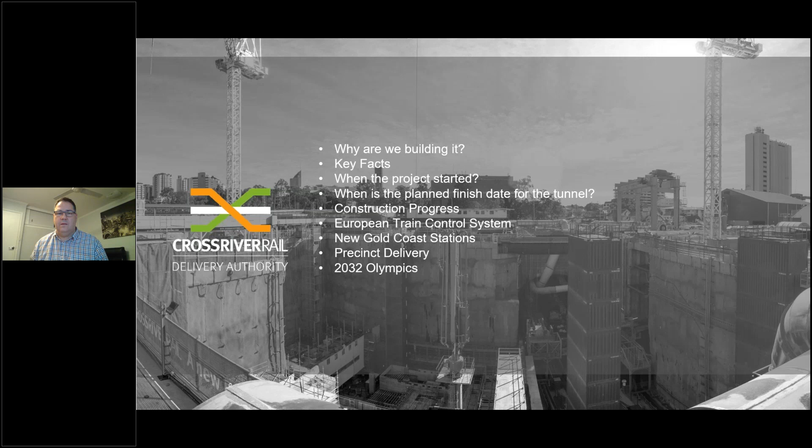So just quickly, Cross River Rail is primarily a second rail line across the Brisbane River - in our case, under the Brisbane River. On the graphic in front of you, the maroon lines are the existing rail lines at Queensland Rail. The blue line is where the Cross River Rail is going to run. There's a metro system currently being constructed, which is the green line - it runs from Dutton Park right through, following the busways. The orange line is the existing busways in South East Queensland. There are some key locations: Dutton Park, Boggo Road, Woolloongabba, Albert Street, Roma Street, and Exhibition Station. I'll talk a little more about those later.

Cross River Rail is basically split into 3 major packages of work. The one I work on is Tunnel, Stations and Development - that's construction of the major tunnel from the southern portal between Boggo Road and Dutton Park, right through to the northern portal between Exhibition Station and Roma Street. Then there's the Rail Integration and Systems team, an alliance arrangement doing a lot of the brownfield works north and south of the tunnel portals, and responsible for integrating all the systems into Queensland Rail's ongoing train operations. Finally, ETCS - no surprise to those of you in Europe - is the European Train Control System, new to Queensland.

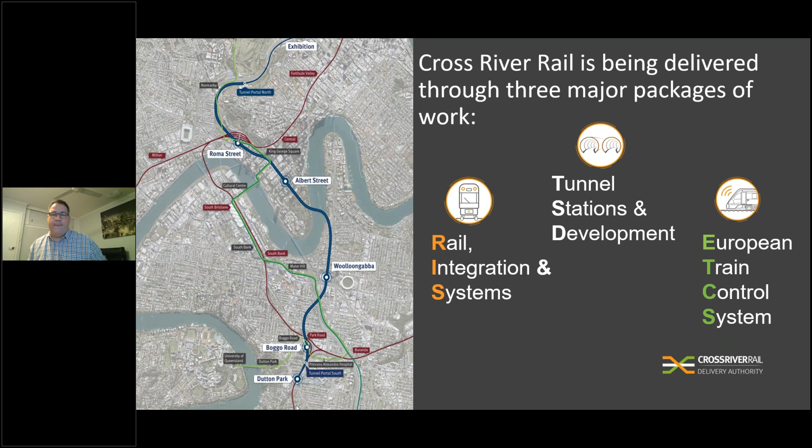So when it's finished, Cross River Rail will deliver just over 10 kilometres of new rail line, just under 6 kilometres of twin tunnels underneath the Brisbane River and CBD - that's the central business district, I'll keep saying that - 4 new underground stations, 8 upgraded stations, 3 new Gold Coast stations, and 1 new world-class signalling system.

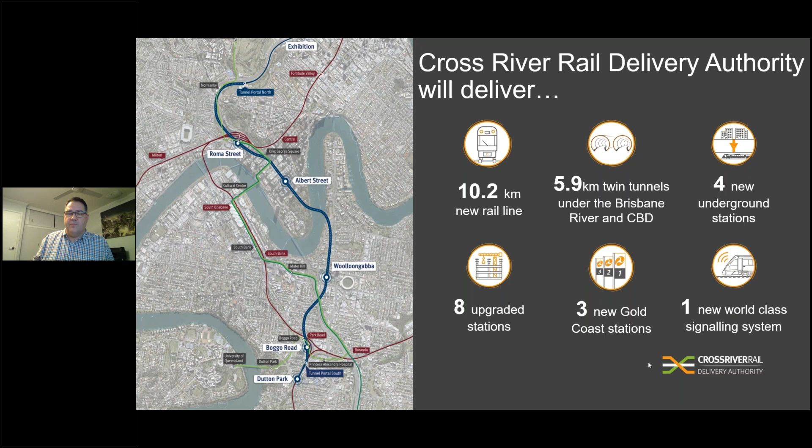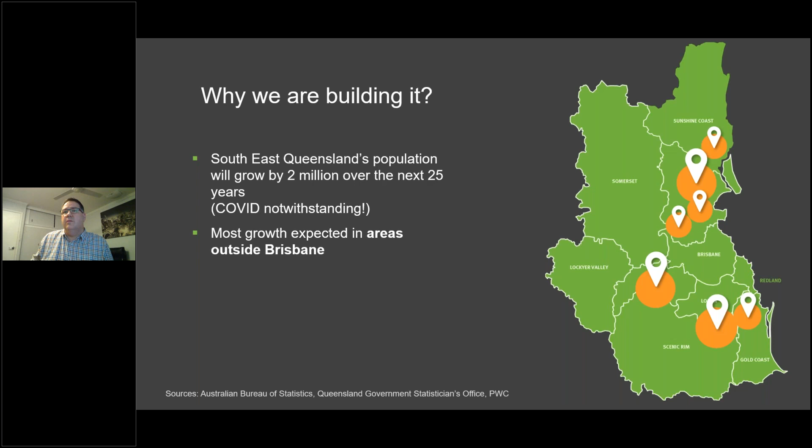So firstly, why are we building it? The South East Queensland population will grow by 2 million over the next 25 years, and that's COVID notwithstanding. To put that in context, Australia's population is around 25 million, and Queensland's population is generally in the 4 to 5 million range - so it's huge growth in South East Queensland. Most of this growth is expected outside the Brisbane area, not in the inner city but in the outside suburbs. The problem is 45% of the job growth in the future will be in central Brisbane, so clearly there's a mismatch - most of the population is on the outskirts, but the jobs are more likely to be in the centre of the city.

So in the future, more people will have more reasons to travel to, from and through Brisbane.

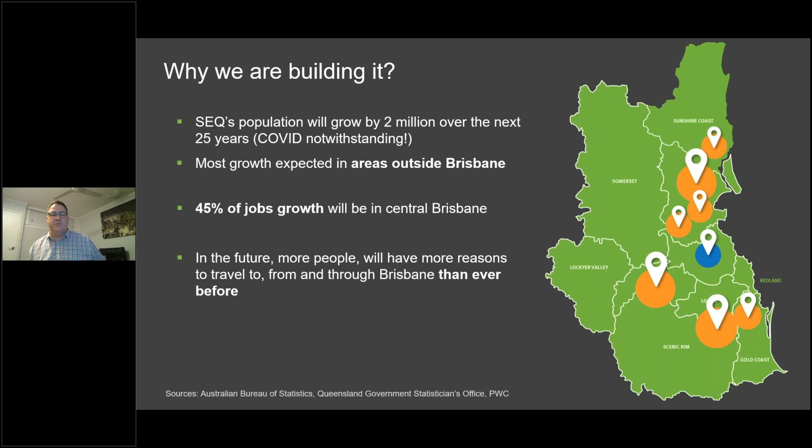The issue of Brisbane's rail system as it stands today is that it's a single inner city rail line. It bypasses the CBD, the central business district, this sort of nose-shaped bit that sticks out. The existing rail line weaves around it, and every single train on the network passes these same 4 inner city stations.

The system also has a bottleneck at the Merivale Bridge. It's only a 2-track bridge. Basically, this line goes off towards the western suburbs, and this line goes down to the south. There's a direction up to the port, but also down towards the Gold Coast.

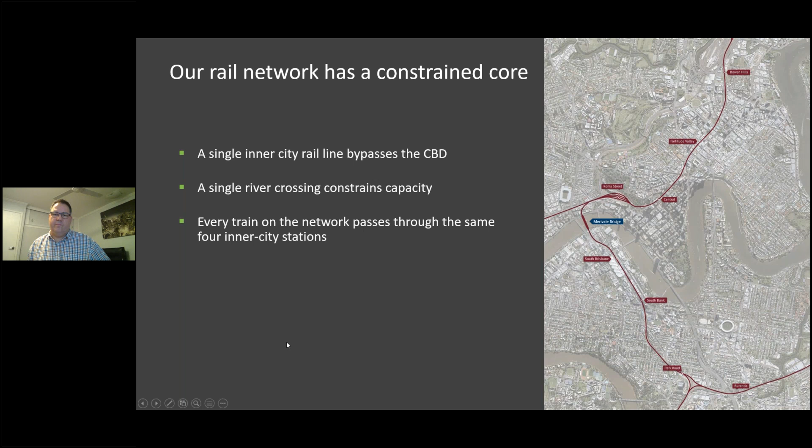So what does cross-river rail mean for the network? Shorter journey times from door to door, the capacity to increase train frequency, a second river crossing, reducing network frailty. At the moment if we lose that crossing, you basically lose the Brisbane rail network. New stations in more convenient locations, increased integration with bus services, and hopefully it'll make public transport more popular and future rail network extensions more viable.

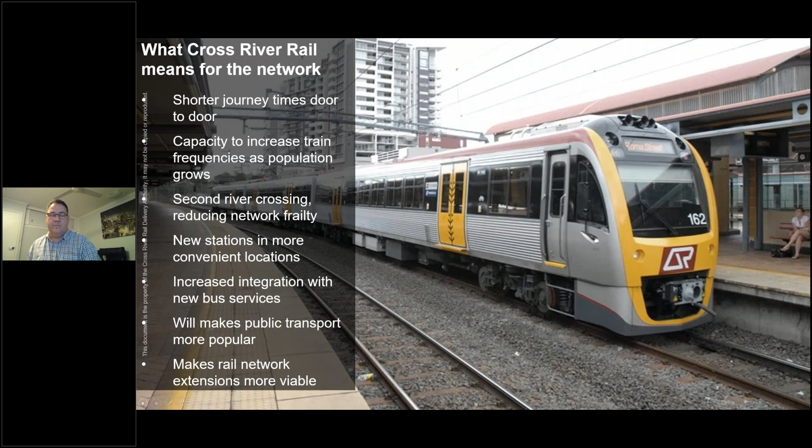So a quick summary of why cross-river rail is needed. We've got population growth of 1.5 million over the next 15 to 20 years. 80% of this is outside of the Brisbane local government area. 45% of jobs growth, meanwhile, will remain central. The road system alone will not be able to cope with that. Our rail network has a bottleneck that impacts the whole of South East Queensland, with just one rail crossing of the Brisbane River at Merivale Street Bridge.

The construction activities are due to be completed in 2024, at which time a detailed phase of testing and commissioning of the new signalling system will commence, and then following extensive safety assessment and accreditation, passenger services are expected to commence in 2025.

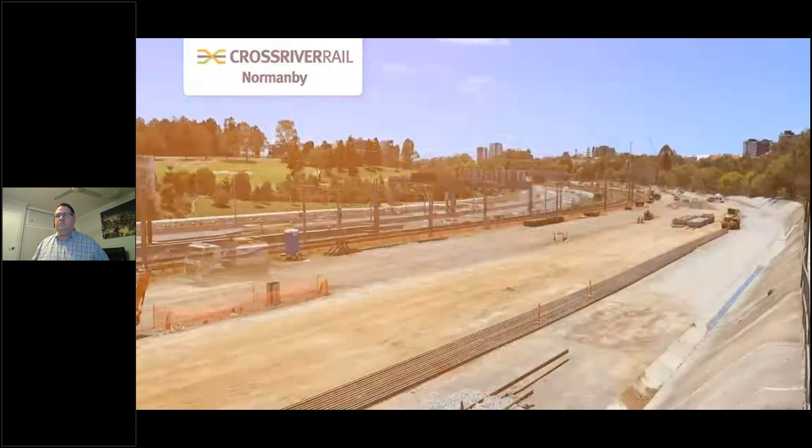So hopefully that gives you a quick flavour of how much we did just to get to the start line, to be honest. That's a fair bit of demolition, particularly some of those sites. Roma Street I'll come back to in the future, because I'll go through each of the sites one by one.

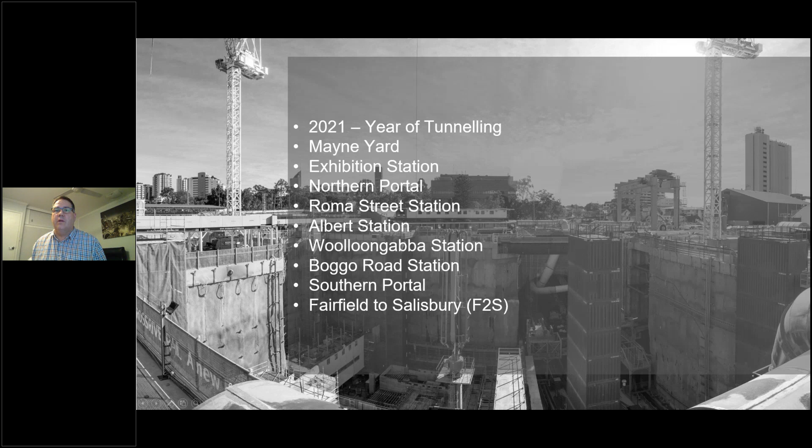2021 was the year of tunnelling, and a fair bit of work went on. So what have I done wrong here? I have. Whoops, sorry.

2021 was the year of tunnelling. The image we're looking at here is east to west across Brisbane. On the north, on the right-hand side, is going up to the Sunshine Coast. On the south, on the left-hand side, going down to the Gold Coast. You can see the Brisbane River snakes through the city and gives Brisbane its name, of course.

And then Roma Street is the one where we had a fair bit of demolition, slap bang in the middle. It's not central to Brisbane geographically, it's a central station, but it's one of the main stations in the centre of Brisbane.

So hopefully this will show you what we've been up to in the last 2 years. Whoops, that wasn't meant to happen. What is that?

I want to pause it and just talk through a few things. So at the end of last year, end of 2020, these are the majors. This is the Roma Street site, so the red is demolition. They took down the old transit centre, hotel, right along the interchange area, and can start to construct the tunnel cavern, ready to receive the TBMs later on.

This is Albert Street. It's slap bang in the middle of the CBD, so it's a very constrained site. You'll see some photographs later on how constrained it is for us.

Further to the south, this is Woolloongabba, and these are the TBMs being placed. We'll see what happens next. Right at the bottom is the southern portal out at Park Road or Dutton Park. Watch the green lines now, you'll see the progress the tunneling machines, the TBM, has made in the last 12 months. The section from Woolloongabba back to the southern portal was constructed, excavated using road headers. This area here is the northern portal, where the TBM has finished their journey.

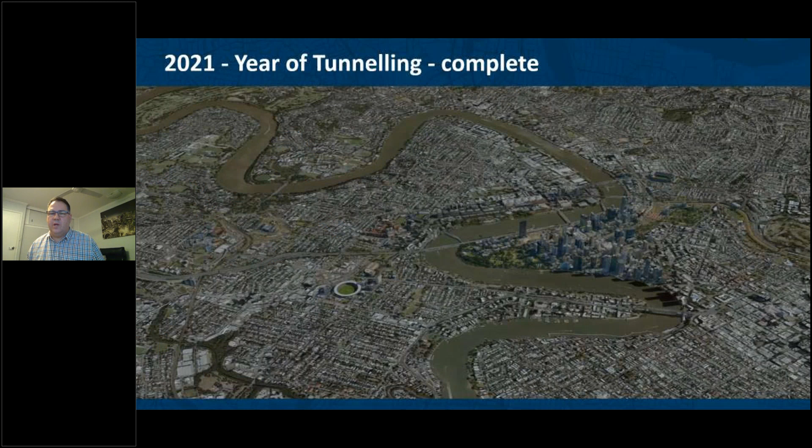So Mayne Yard - this is a significant stabling yard upgrade. 60 turnouts and crossovers, about 22 kilometres of track works, 1.5 kilometres of internal access roadworks, the relocation of the QR buildings, 18 stabling roads in Mayne East Yard. On the next image I'll show you what Mayne East is and then Mayne North - 9 stabling roads in Mayne North Yard, and 3 footbridges.

The other thing is this used to be where the main Queensland Rail maintenance teams are located, and part of those early works were to move these teams to alternative facilities in the Brisbane area, but obviously still close enough so they can do reactive maintenance activities.

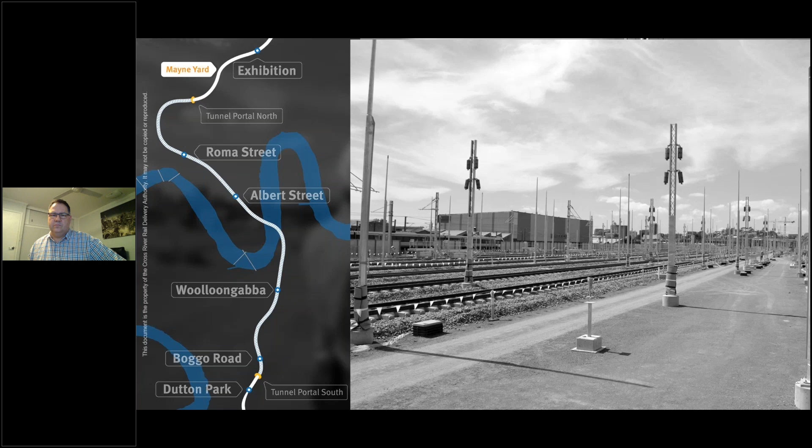So this is the Mayne North site. It's a fair size. This was all yards before, it's been there for a very long time. This is Breakfast Creek alongside - you say creek, it's almost like a small river, really. And in the background there you can just about see Mayne East Yard. This is basically where most of the stabling takes place today of the passenger trains.

So in the middle of this is being built a brand new rail traffic crew building. This photograph, I think, is from the middle of last year - the roof is complete, so it's got walls and a roof, and internal walls are about 30% complete. There's also, down here, one of the sidings is a graffiti building, so the walls and structural steel for that are completed. The first 4-5 track roads are completed and ballasted, and then they're currently earthing and bonding for the track roads from 6 to 11.

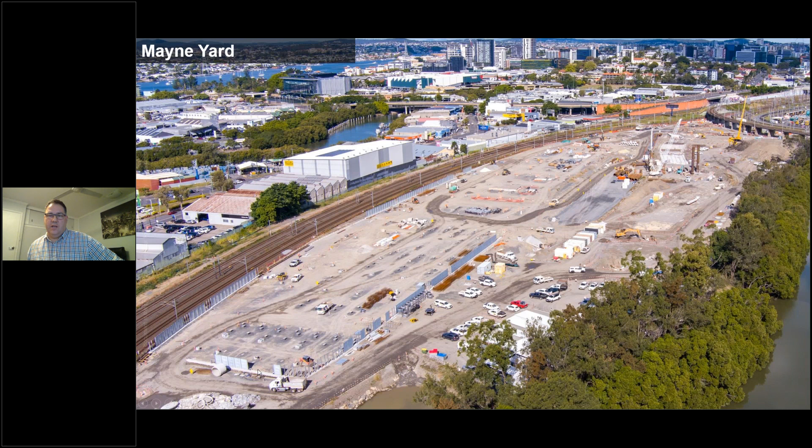Signalling is almost complete, and the CCTV installation is halfway through. The next photograph should show that in a bit more detail. So this is the status of the same location today - it's starting to look a bit more like a rail yard than just a patch of dirt.

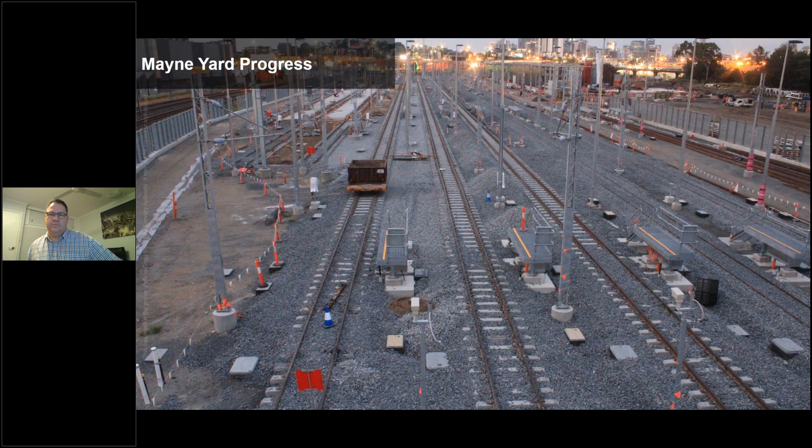The next location is Exhibition. So a quick history lesson on this one. The RNA, the Royal National Agricultural and Industrial Association of Queensland, was established in 1875 with the then-day governor as its president. This location was chosen as the site for the first show, the Intercolonial Exhibition of 1876, held in August of that year - the middle of winter for Brisbane. It was declared a public holiday, and about 15 to 17,000 people, out of a Brisbane population of 21,000 in those days, attended what was then called the Ekka.

So exhibition, and often to local Brisbaneites, the name has been replaced with the Ekka. The Ekka show happens once a year in the middle of winter. It's usually for locals, particularly by the end of winter - you get the Ekka winds, a subtle change in the weather, and then it gets a bit warmer after that into September.

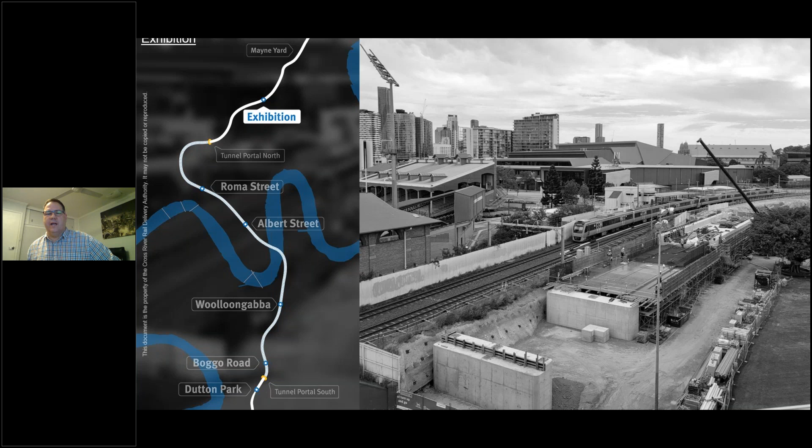So this is a nice view of the future Ekka station being constructed. Here you see the showgrounds, you see what it's all about. Looking into the future, this will form part of the Olympics - this will be where the equestrian events are held. So large in this location.

The blade walls on the viaduct here are complete. The new deck, new viaduct, is a little bit more progressed than shown in this photograph, but it's about 80% complete. There's also the long retaining wall being put in here. This track is going to slew across towards us in the picture - it's got to accommodate the Cross River Rail tracks as well as the existing rail line.

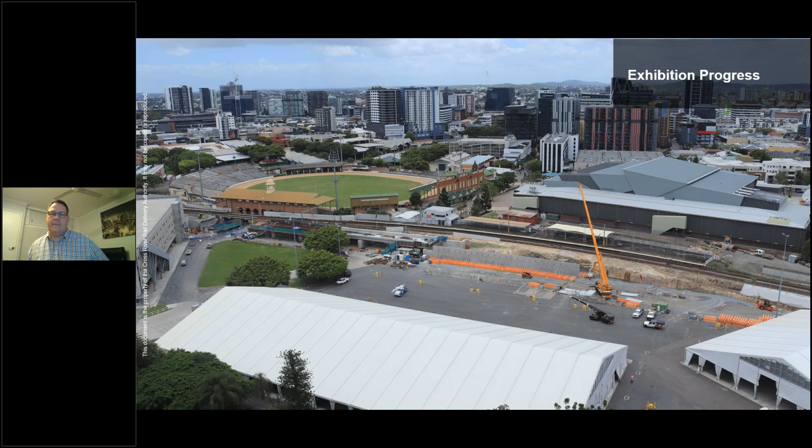What was Normanby sidings - this used to be rail sidings only 5 years ago. So the sidings, these are obviously all dismantled and taken away to facilitate the space for the tunnel to appear.

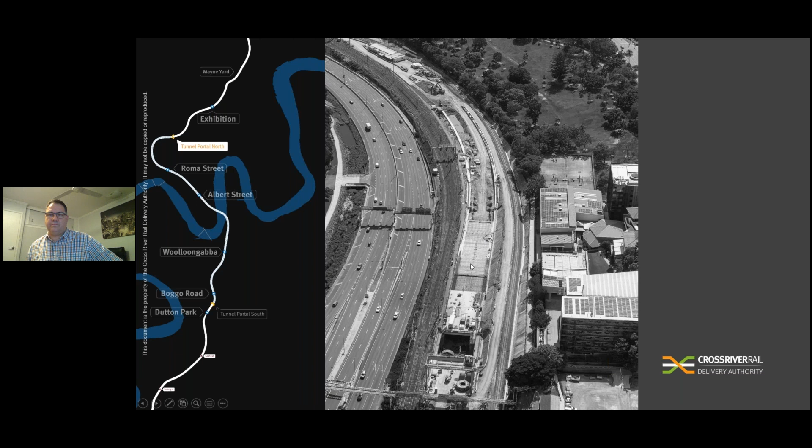So it's slotted between the inner city bypass on the left-hand side here, which is the main bypass from Brisbane City. The exhibition line is a rail line just alongside it, which is the freight bypass around the city. The lines that go for the city go through tunnels and won't accept freight traffic, so this is the way of getting freight traffic around the city, and things like dangerous goods requirements, which you normally don't want to send through the city.

On the other side, there's a holding road that was newly constructed to facilitate the portal, and a large secondary school on the right-hand side. You can see it really is slotted quite tightly in there.

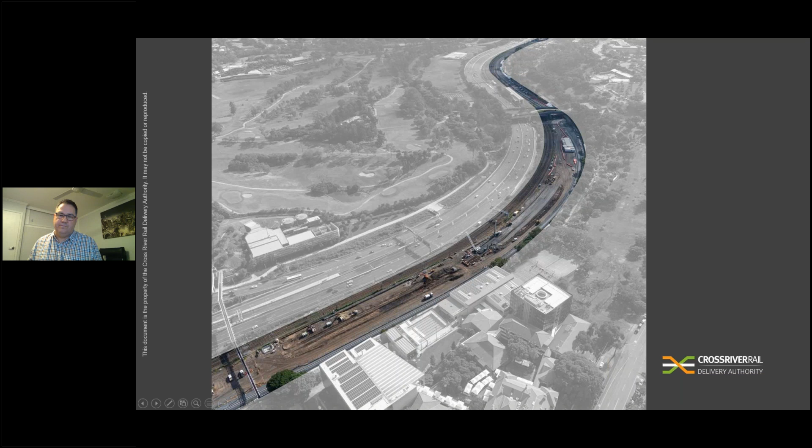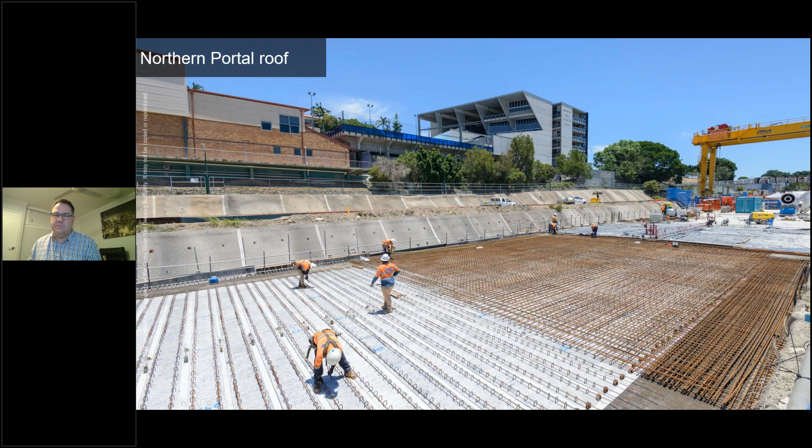This is showing the construction of the northern portal. In the background you can just about see the TBM gantry, so it's being used for the TBM extraction. Also just a little bit further back is quite an old timber structure, a footbridge that goes across the tracks there. That was part of the challenge actually, to monitor it and make sure it didn't get moved by the tunnel coming through underneath, since it's quite a lightweight structure.

So the two TBMs, Elsa and Merle, they weigh 1,350 tonnes each. They're about 165 metres long. Those cutting heads are 7.2 metres in diameter, and each one weighs 106 tonnes. The TBMs have a crew of up to 15 people, and they cut at a rate of around 20 to 30 metres per day. In total, those TBMs completed 3.8 kilometres and installed over 27,000 concrete segments, each weighing about 4.2 tonnes, and each ring is made by 6 concrete segments.

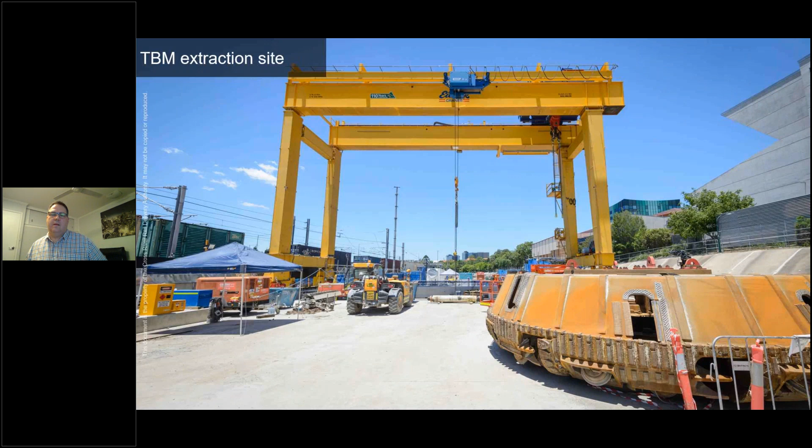So this is a recent photo of the tunnel. This was December, just shot as they'd taken the TBMs apart. That's just below the gantry.

So some quick facts about the segments: they were produced by a local company, Wagner's, on a $40 million contract. There were about 27,000 precast concrete segments, each weighing about 4.2 tonnes. With some quick maths you can figure out there's about 4,500 rings required to line the twin tunnels.

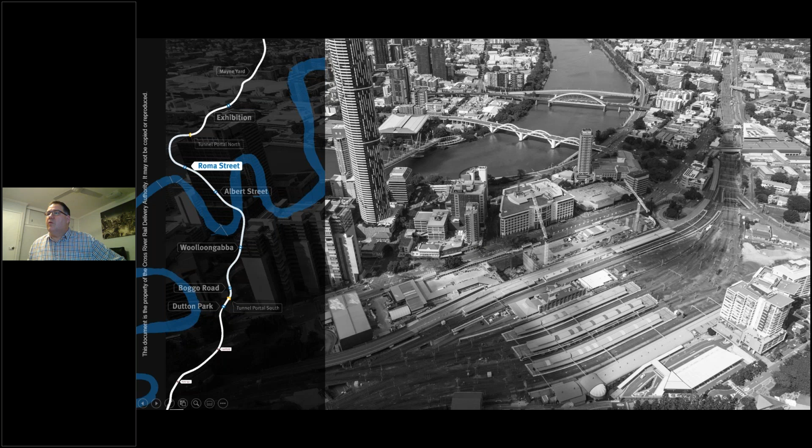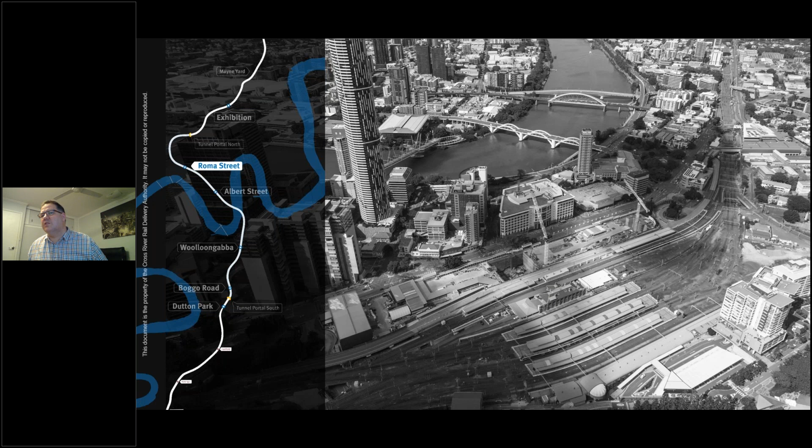The next site is Roma Street. This is where, in that quick video shown earlier, the old transit centre and hotel was completely demolished and progressively taken down. Now this is a busy part of the city, so that's no small feat to get through while still allowing the business of the city to operate as normal.

The station is also close to Suncorp Stadium, and this location will also be the future site of the Brisbane Arena. I think that's where the aquatic events are for the Olympics into the distance - well, it's only 10 years away now.

So you can see the station box and the tunnels in the centre, the cavern, and then the services building off to the right-hand side for access in the future. I think that's where the ventilation is as well, from memory.

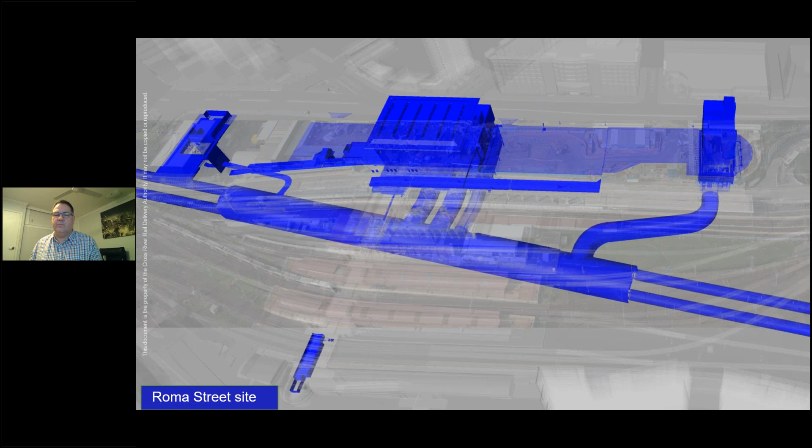So here's the station box of Roma Street. Excavation is complete now, something like 38,000 metres cubed. The blinding is complete for the base. They've put the drainage installation in, and the lift overrun is what they're currently completing.

On that services building I pointed out, they've again finished the concrete blinding, put in some suspended deck and ground slabs, and also installed the cavity drainage.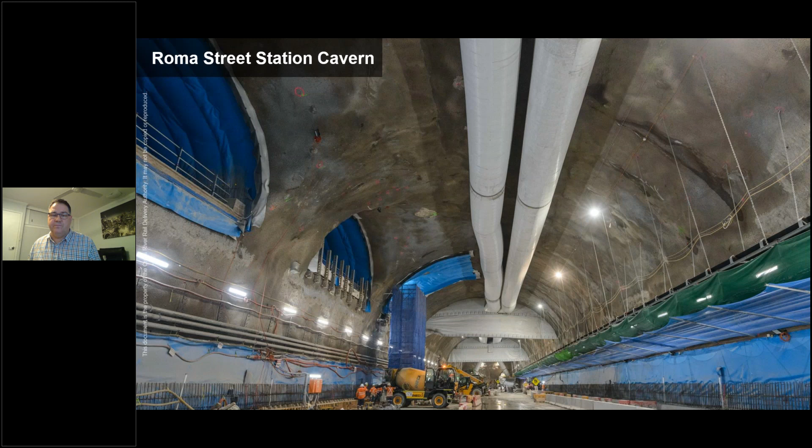So the next location is Albert Street. As you can see, this is slap bang in the middle of the CBD. This will be the first CBD train station built in more than 120 years in Brisbane. Albert Street Station will dramatically improve connectivity to the southern part of the CBD.

Just as a fun fact, all the streets in the Brisbane CBD are named after the royals. Those based in the northeast are named after female royals, and those facing perpendicular to that are named after male royals. So if you're ever lost in the CBD, you can have a rough idea which way's which.

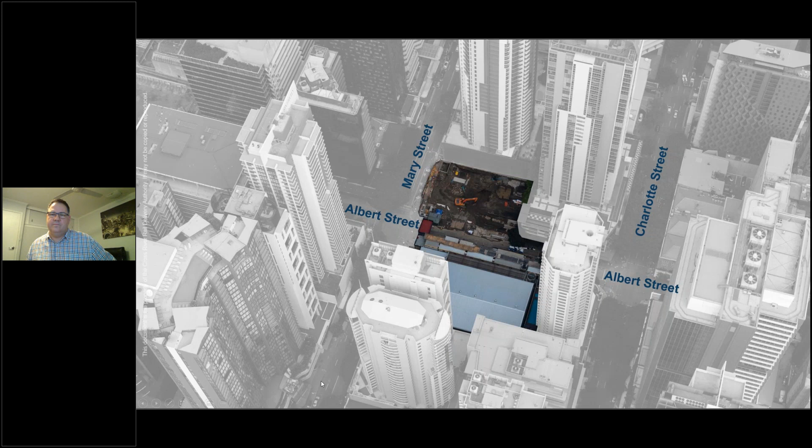As I said before, this image is just, there's 3 lots at Albert Street, and they're literally just one on top of the other. It's quite difficult to even visualize what's going on there. When I went there before, I think last September, all the material was lifted up and down this shaft. I think they've got the tunnels right through now, but the excavation was all coming in and out of this shaft for this location.

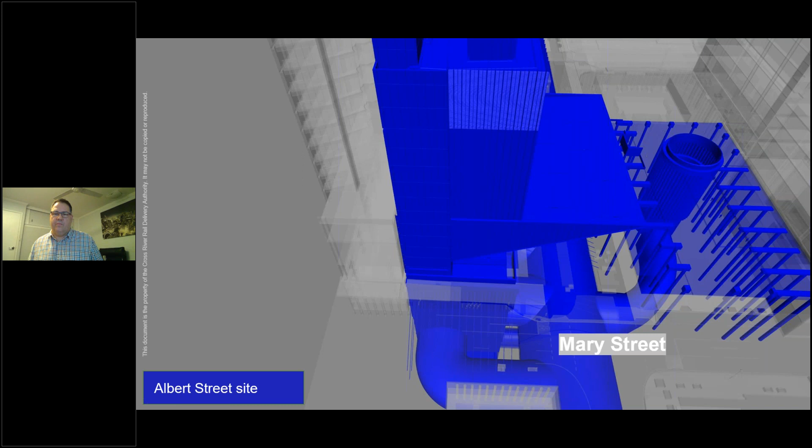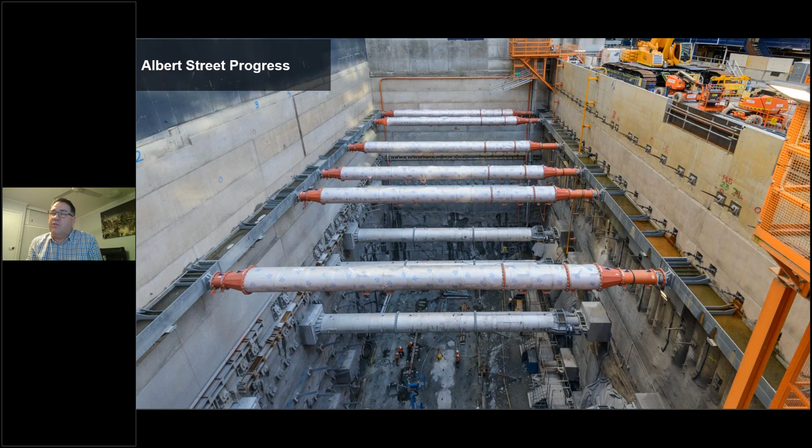As I said, Albert Street is 3 lots. This is lot number 1, this is the station box. It's about 3/4 of the way complete, about 34,000 meters cubed of material being excavated. At its deepest point it's 30 meters below ground. The spoil removal is ongoing and the ground retention work is ongoing.

This is lot 2 at Albert Street. Here, what they're currently doing is finishing the access adits. The waterproofing and permanent lining are complete, and they're doing cavern bench blasting at the moment. It commenced about a month ago, the blasting is ongoing, and the spoil removal is obviously still ongoing.

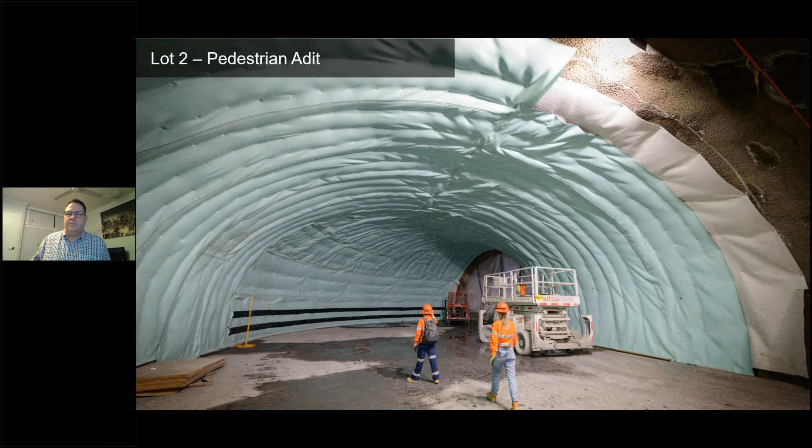Lot number 3 at Albert Street. Still, you can see all 3 very close together - you could throw a stone between them. The station box is half complete. It's quite small in comparison to some of the other sites, only 10,000 meters cubed, and relatively shallow, only 8 meters below the deepest point. Again, spoil removal is ongoing, and the ground retention works are ongoing.

The next site is probably one of the more famous sites, definitely from a world perspective. So Woolloongabba, or the Gabba, as cricket aficionados say, or if you like Australian rules football, that's where the Brisbane Lions play as well. The TBM tunnel fit-out works have commenced, with the first sections of the invert slabs underway, and they've completed about 200 meters. The tunnel runs that way - sorry, I lost my bearings myself.

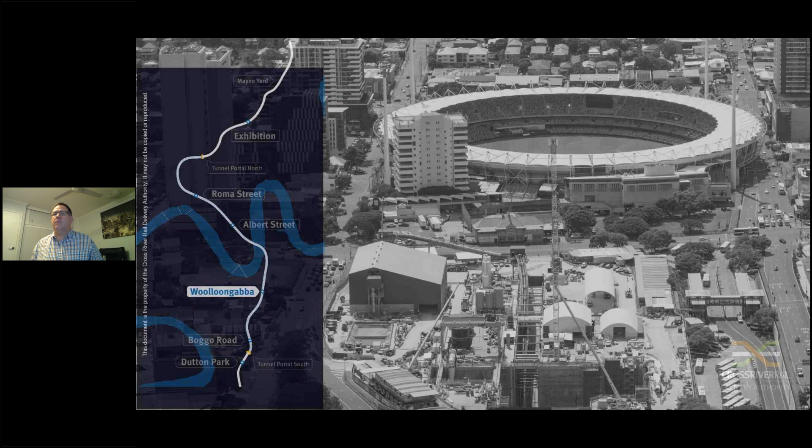So again, this is a view of what Woolloongabba will look like into the future. The southern cavern is finishing, akin to the back-of-house fitout works. The northern cavern - whichever bearing this one is - the permanent lining works continue, and the waterproofing and steel fixing are underway. The intent here is that in the future you can catch a train right to Woolloongabba Station, appear on surface, and walk straight into the stadium. I think that's one of the major venues for the Olympics, and maybe the central one.

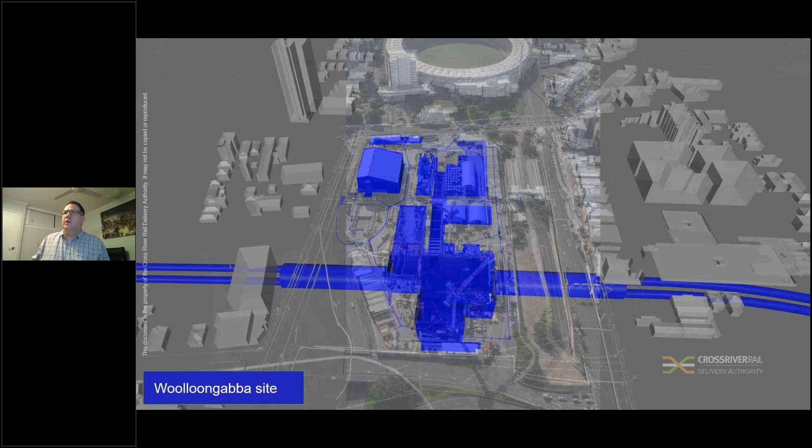Still at the Gabba, this is the station box. They've almost completed the back-of-house slabs. As I say, it's a very busy site - this is where both the TBMs launch from. So once the TBMs got underway, they could get on with trying to build the actual station at Woolloongabba.

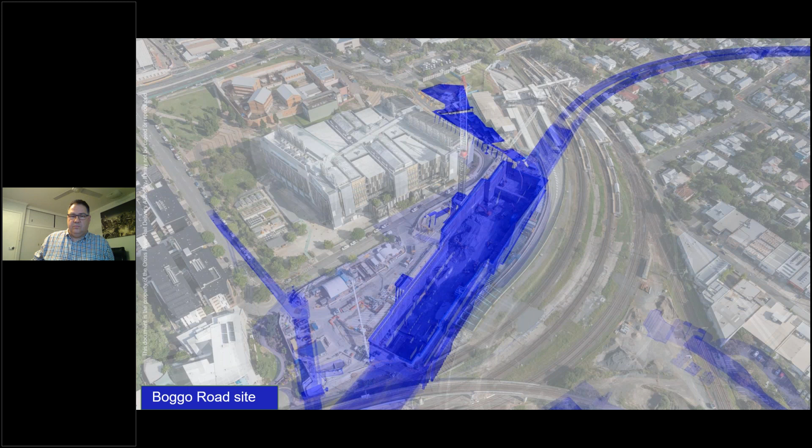Still at Boggo Road, so some high-level facts there. The station box is finished. 140,000 meters cubed of material has been taken away. That northern tunnel cavern, the bulk excavations are complete - again another 26,000 meter cubed of material. The northern cavern ventilation has been relocated so they can carry on doing the waterproofing.

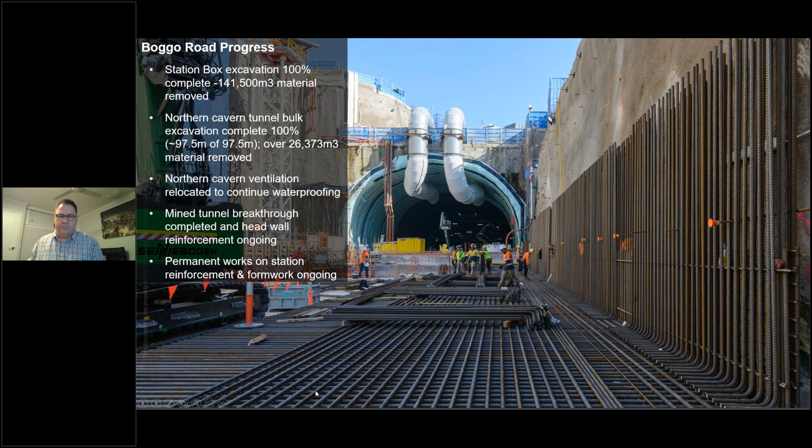And the mine tunnels, this is where the mine tunnel came through from Woolloongabba. It's been completed with the head wall reinforcement going on. You can see there the formwork, the reinforcement for the permanent works is starting to be put up and be poured soon. I'll say one thing, if you like concrete, this is a project for somebody - there's plenty and plenty of concrete.

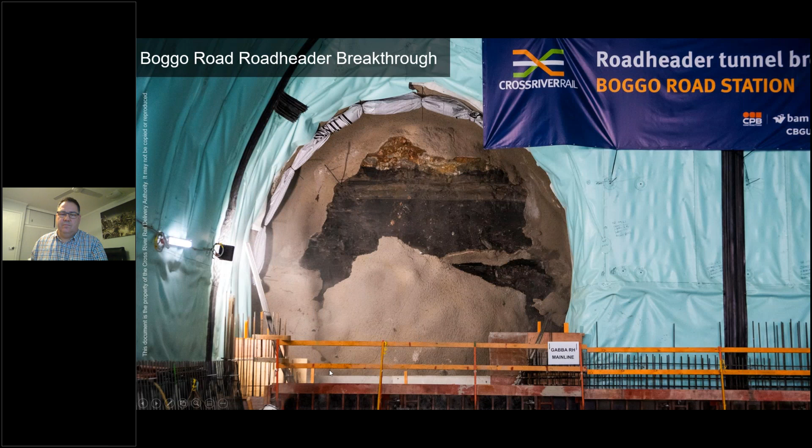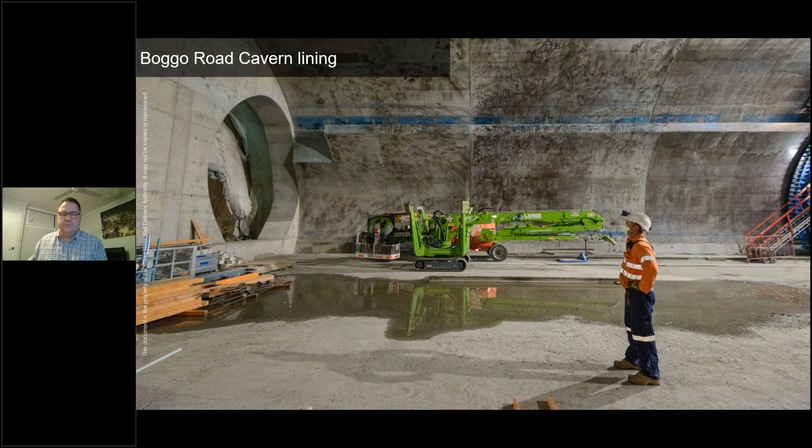It's quite high, from Peter Doherty Street to the Princess Alexandra Hospital, and it's a shared user path. As I said, the bridge resolves a missing link for connectivity in the area.

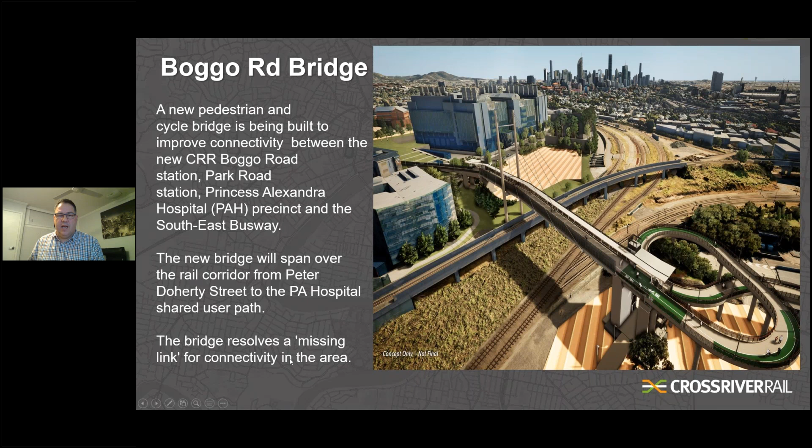So some big facts about the bridge: 480 meters long, 45 meter high cable spire. The main deck is 20 meters above the ground. Separate lanes for pedestrians and cyclists, lifts and stairs on both sides for accessibility, a grade separation at Peter Doherty Street, 1 in 21 gradients so suitable for pedestrians and cyclists. And then along the way, seating, rest stops, shade, which is quite important in this state, and planting, and obviously security mesh for your normal considerations above an active rail corridor.

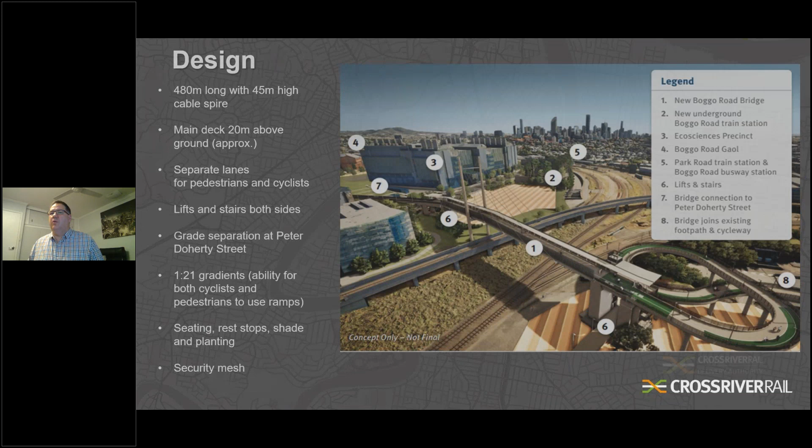Next one is the Tunnel Portal South. Now this was my Christmas - basically we took a closure to do the alignment of this from about the 18th of December right through to the 4th of January. So it's a huge amount of focus over Christmas. It included not only moving the railway lines, but also doing the signalling alterations. For those who've been involved in signalling, that's always a challenge.

So, if you've got the eyes of a hawk, you'll spot that some of these lines are actually dual gauge, both 1067 and 1435 mil. The Port of Brisbane is off to the right here, and this is where you'd see coal traffic that comes from the West Moreton system, inland Queensland, and off to the Port of Brisbane. It's also the rail line that connects basically to New South Wales. If you were catching an XPT train up here into Roma Street, ultimately this is the path it would take - and again that's a standard gauge train, so a different track gauge.

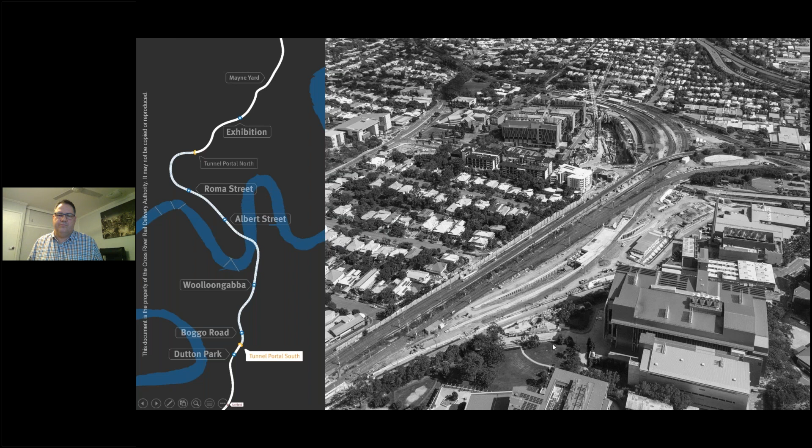So a quick image here, this is just before Christmas, this is December 21. So this is the piles have been installed, and there's capping beams ongoing above. So I see that'll finish off in the next few months.

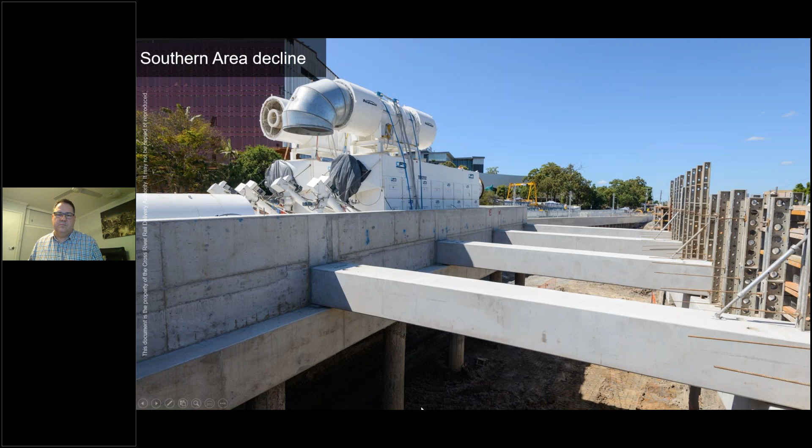And as I said, whilst it says stop, that's not what we did over Christmas. It was a huge amount of realignment work. All disciplines were involved over the Christmas period. New lines built, old lines taken up, plain lining of crossovers, complete signalling alterations. Bear in mind the signalling there is not ETCS, it's our existing traditional system, relay based. So a bit of an upgrade, update, should we say, to enable the tunnel to come out right in the middle of what was used to be a mechanized maintenance depot, where we used to feed the servicing machines, tampers, regulators, those sort of things.

So the next one should be a quick montage of everything I've gone through, but obviously in a nice time lapse. So let's see how this goes.

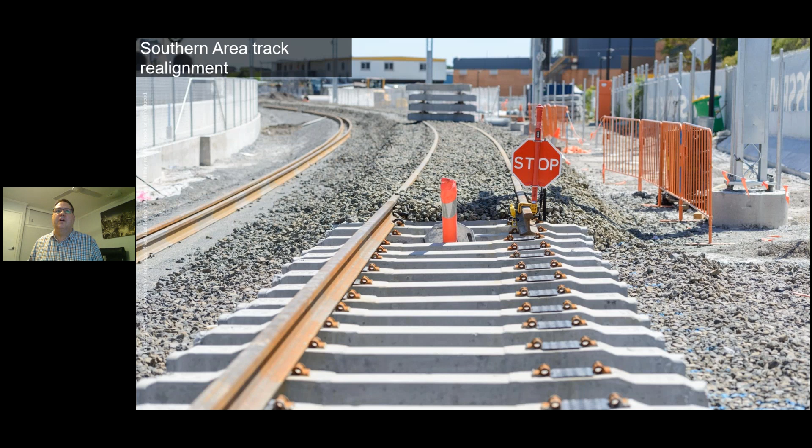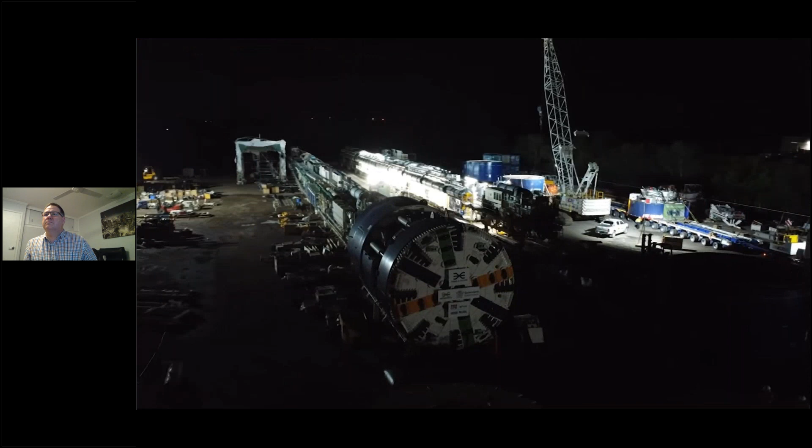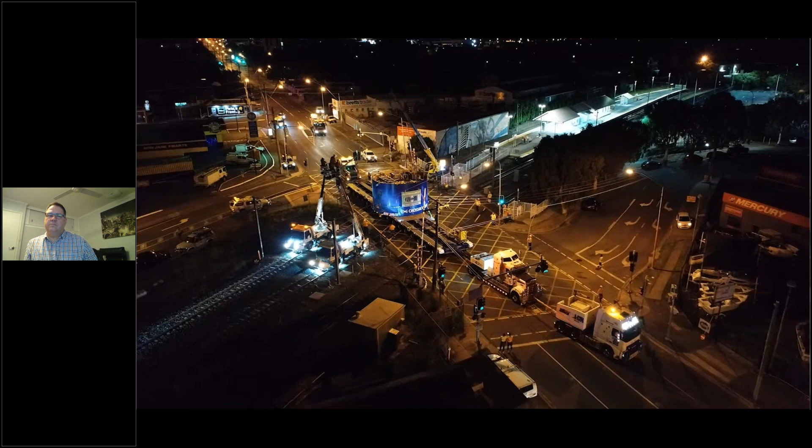Cross River Rail's first mega machine is about to disappear under Brisbane. 165 metres long and weighing 1,300 tonnes, 42 metres below the Brisbane River, with a crew of up to 15 people on board. The machine will cut through 20 to 30 metres of hard rock every day. Transported in parts from Sydney, it was carefully fitted together on site, now ready to forge ahead. Named after trailblazing Queensland engineer Else Shepherd.

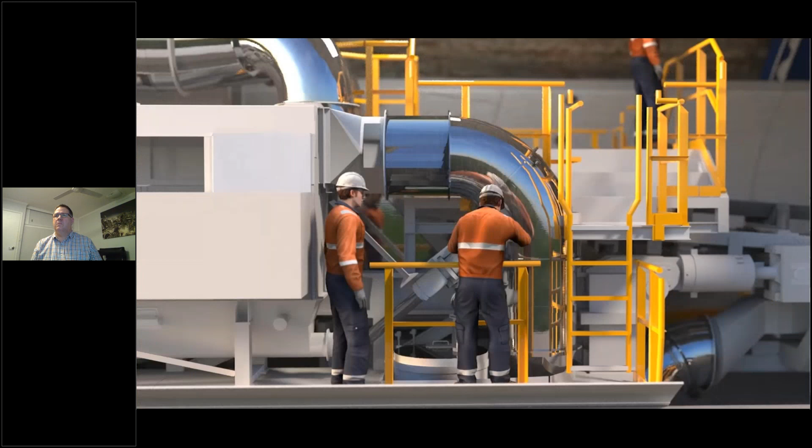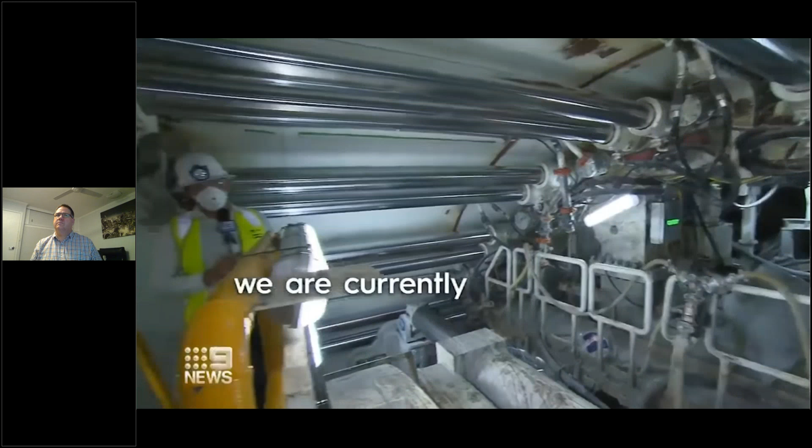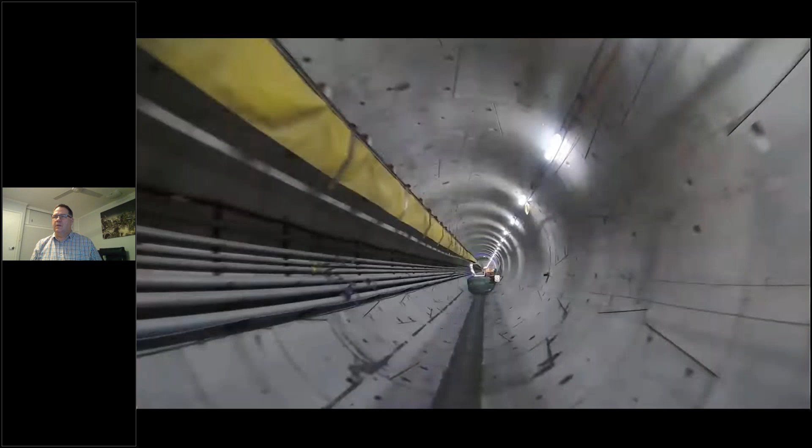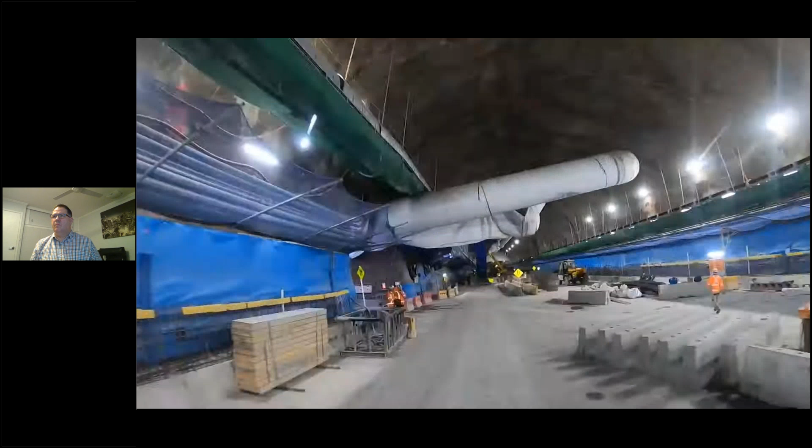Digging deep underground beneath the heart of Brisbane. Right now, our city's new underground is taking shape at King George Square. The Annie Fuller has it first. Out of sight beneath everyone's feet, walking here at King George Square, two tunnel boring machines are digging deep, working in overdrive to carve out Brisbane's new underground. Halfway through their nearly 4-kilometre journey, they'll move to the brand new underground station at Boggo Road.

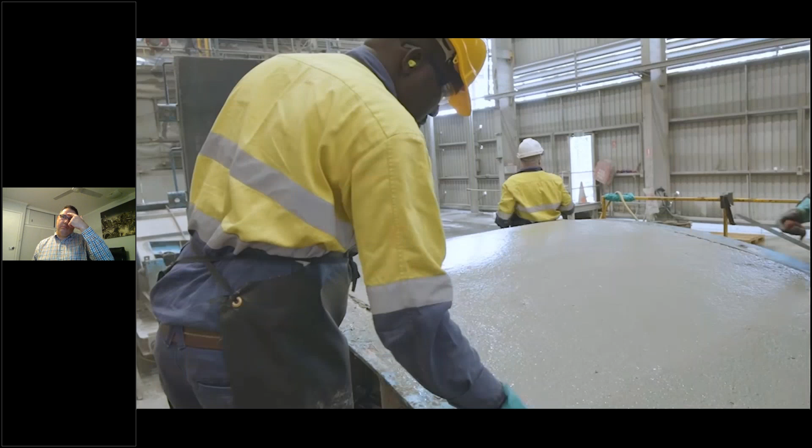Tonight, 7 News can give you an exclusive look as the final concrete blocks for the Cross River Rail's tunnels roll off the production line. Weighing 4.2 tonnes, it's the last time these large blocks will see sunlight. 130 staff at Wagners have moulded, cast and shaped more than 27,000 concrete segments, a major milestone in the city's Cross River Rail project.

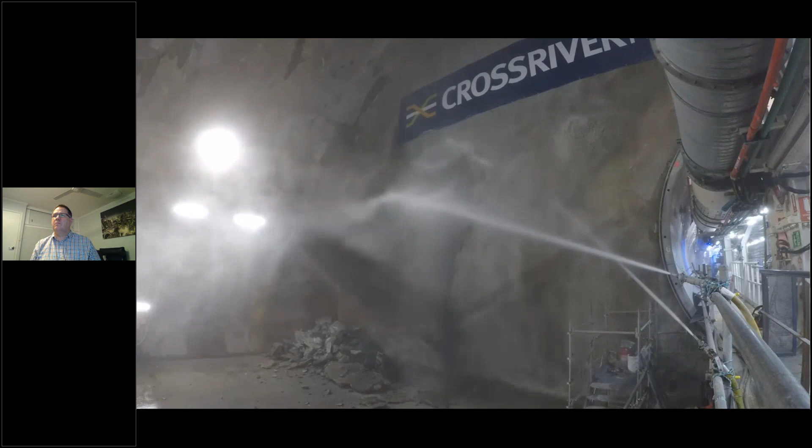Tonight, 9 News will show you the breakthrough moments in underground tunnels from Woolloongabba to Boggo Road. History has been made in Brisbane's city centre. Tunnelling machines hit a major milestone. The second of two tunnel boring machines breaking through the rock here behind me, another milestone on the Cross River Rail's trek across and under the city. Cross River Rail has hit another milestone, a tunnel boring machine opening up a second line into the new underground Albert Street station.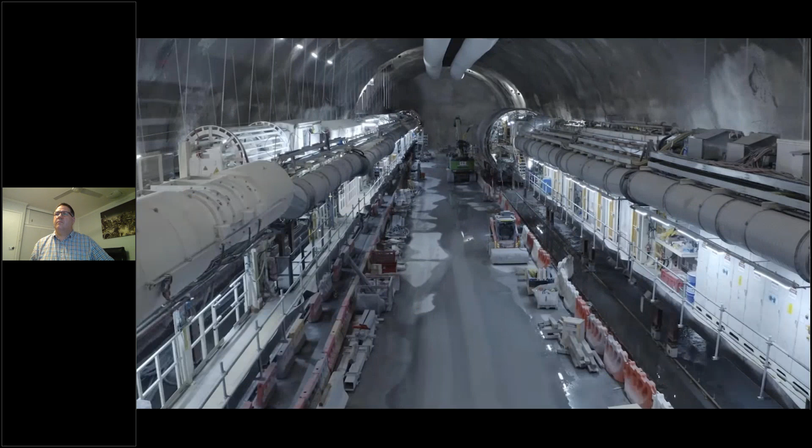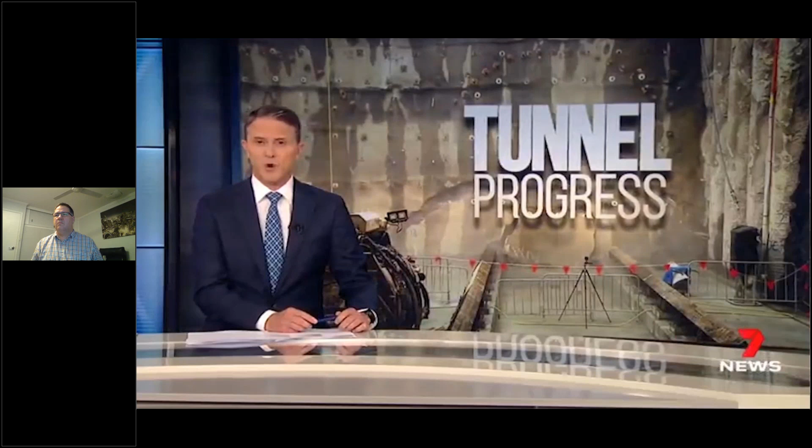But getting this far hasn't been easy. Engineers faced difficult conditions below Brisbane. There was a breakthrough: the Cross River Rail's first boring machine crashed through its final rock wall, marking a major milestone. Today Else saw daylight after 294 days in the dark. Cross River Rail has reached another milestone, its year of tunnelling coming to an end. The final machine broke through today, reaching a pivotal point in Brisbane's Olympic preparation. Another breakthrough for Cross River Rail, ready for Queensland's golden age, which is now well and truly on track.

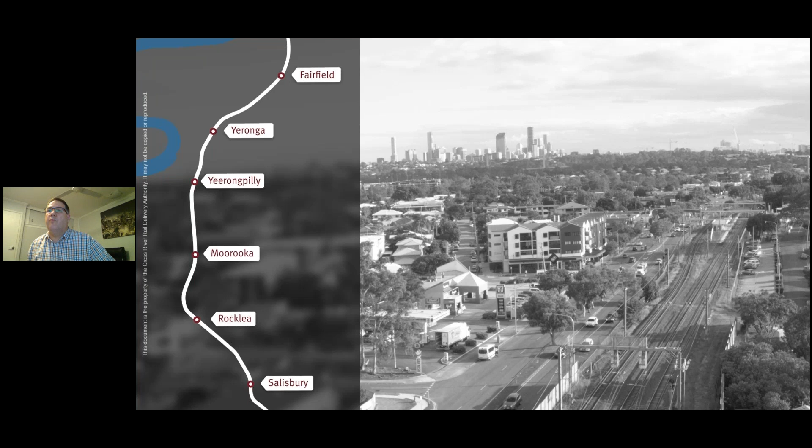So those are the 6 stations, F2S, being rebuilt: Fairfield, Yeronga, Yeerongpilly, Moorooka, Rocklea, and Salisbury. You'll get used to the names as well - it's like Welsh place names, you get used to them quite quickly.

The Yeronga station is currently the one that's had a lot of work done in the last few months. It's currently closed for 6 months. The works at Yeronga include raising platforms 1 and 2, moving the in-ground services, retaining walls, shade canopies, and other station amenities.

To help customers with that, there's also been a temporary bus service installed at Yeronga for those people impacted by the Cross River Rail project. Because you can imagine there's a huge amount of work going on, and there's a lot of consideration for our customers.

So this is the Yeronga station progress - there's plenty going on there. They've almost completed all the screw piles, put in just over 250 screw piles, and almost completed all their bored piles as well. Almost 1,000 square meters of platform slab done on platform 1, and about 600 square meters done of slab for platforms 2 and 3.

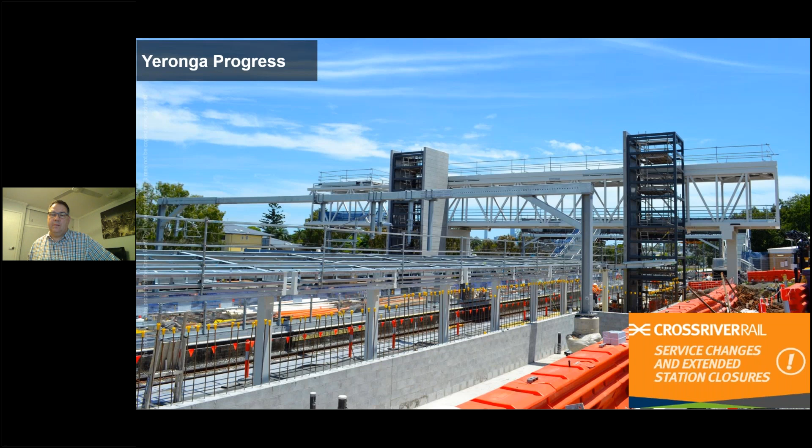Next along - not easy to see on the line - something that wasn't part of the original project got added: Clapham Yard, a new yard being built for rail services on the southern side. The bulk earthworks are ongoing, as is the drainage installation. Big retaining walls are being constructed, and there's relocation of 11 kV power supply. In the background there you see Mauri Foods, a flour and bread provider, so it's important to keep access to local businesses at the same time as that's ongoing.

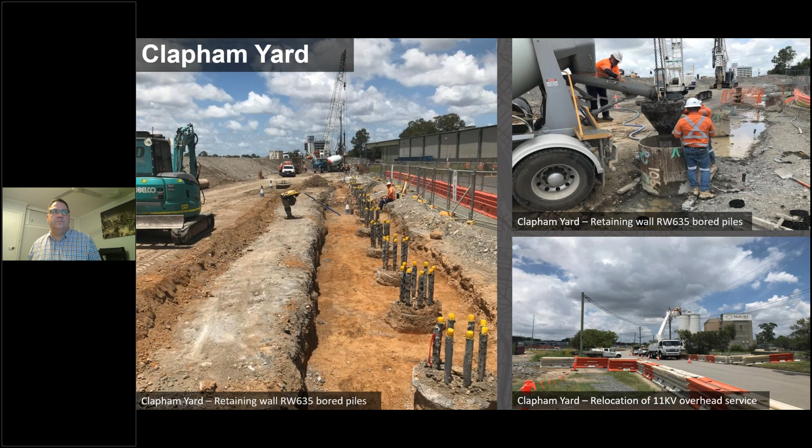Next one is ETCS at Redbank - the depot, the train maintenance facility. This is one of the units, 276, and I think the other one's 261 behind it - the first trains to be fitted with ETCS in the Queensland Rail network.

The pre-validation testing has been done in the integration lab for these works, and also there's a railway line to the north of Brisbane, the Shorncliffe line, that's been fitted with radio masts and antennas, including at North Boondall and Nudgee sites, where we've recently had a successful powering up of that unit.

So you can imagine it's completely dismantled on the inside, all the fittings taken out, and fitted with ETCS. They also built a small test track outside to do the low-speed testing at Redbank.

A recent achievement was, following those compliance checks, it received an interim certificate of engineering compliance. That was great for getting it ready onto the Shorncliffe line to do its in-field testing of the unit, because ETCS is new to Queensland Rail, so it's a new thing.

Further south, this project just keeps going. There's 3 new Gold Coast stations. Gold Coast is probably famous for beaches - Pimpama, Hope Island, and Merrimac were announced in September 2019. Those are going to be delivered as part of the Crossrail project, boosting capacity on the Gold Coast line.

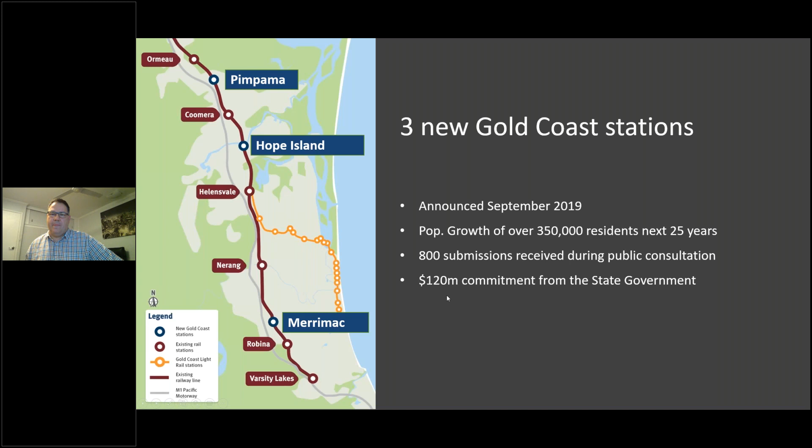This shows Hope Island, an artist's impression of one of the new Gold Coast stations. In reality, the first station that's been worked on is Pimpama. The early works are continuing - it's currently at the site establishment stage, with works to commence starting this year. We're in the stage of design progression, environmental studies and approvals, and the procurement strategy is being finalised. So that's bang up to date.

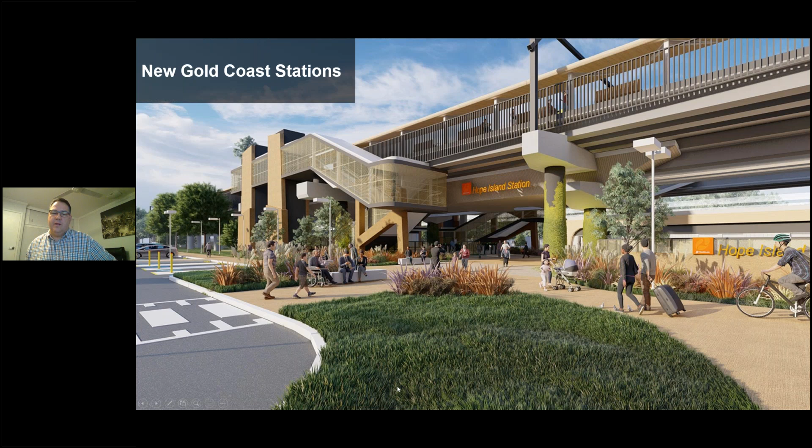Last couple of slides - the precinct delivery, both at Albert Street and Roma Street Station. Crossrail is not just a rail project, we're trying to transform the whole public transport network and create new public spaces. These are some of the community precincts and opportunities for urban renewal and economic development and investment.

There was a strategy, the Crossrail Precincts Delivery Strategy, released late 2019, a blueprint to shape future development in and around Crossrail's 4 underground stations. Crossrail is working in partnership with Queensland Treasury, Economic Development Queensland, and Queensland Investment Corporation to master plan who else might build on its developable land at each station location. So that's an ongoing development opportunity.

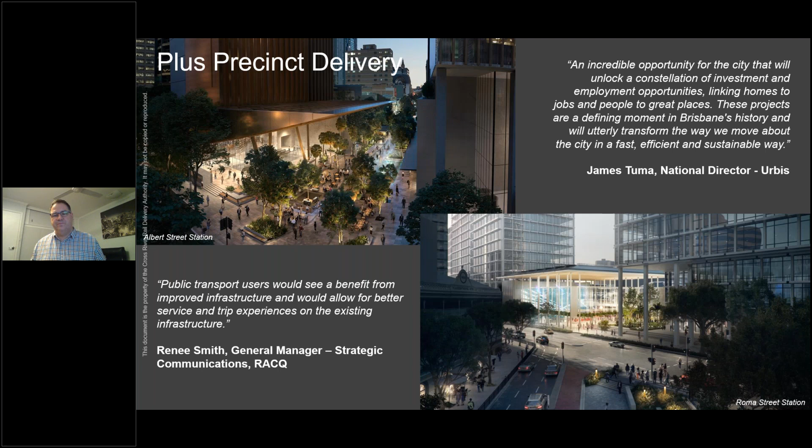The Brisbane 2032 Olympics and Paralympic Games - Cross River Rail has played a key role in helping secure the 2032 Olympic and Paralympic Games. The transport connectivity enabled by Cross River Rail has unlocked key infrastructure opportunities for Olympic legacy facilities, which will be enjoyed by Queenslanders for decades to come.

In 2032, patrons will use a range of transport options including public transport, shuttle services, on-demand services, private vehicles, and active transport to get to and from Olympic venues such as the Gabba. The addition of the Cross River Rail new high-capacity Woolloongabba station will make passenger rail the heavy lifter to efficiently and safely move high volumes of patrons to and from the stadium and seamlessly connect with other venues. The connectivity provided by Cross River Rail means people will be able to attend an event at the Gabba and then take a 2-minute journey to Albert Street station in the heart of the CBD.

Which would be just a few minutes walk away from future precinct developments at both Queen's Wharf and Eagle Street. Or take another 4-minute journey to Roma Street Station to watch the swimming and water polo events at the newly constructed Brisbane Arena, or head to Suncorp Stadium for the rugby and football finals. Finally, you could take a 9-minute journey back to Exhibition Station, as I said at the beginning, to watch equestrian events at the RNA Showgrounds in Victoria Park.

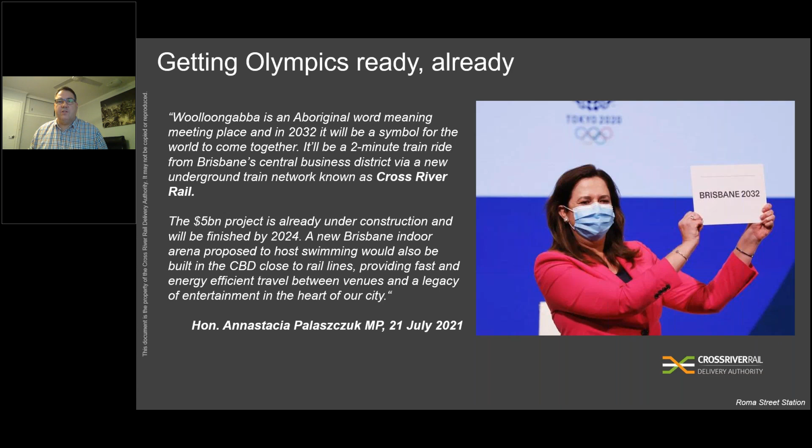At one point it was starting to distract me a bit, which is interesting. I'm looking forward to having a chance to answer them now, actually.

Right, thank you very much for that, Alex. Paul Ebbett asks about the track gauge. You mentioned there's two track gauges in Brisbane, but your main one's 3'6", isn't it? Yeah, 1067. I've gotten used to saying 1067 is normal and 1435 is wide. The predominant track gauge in Queensland is 1067, and the tunnel is 1067. But as I said before, on the southern portal is where the lines weave both towards the Port of Brisbane and on towards Roma Street, and some of those lines are dual gauge.

Ravi Teja Korala asks what kind of TBM was used. That fits in quite well with a question from Paul Ebbert about the ground conditions, so the two probably go together. I don't profess to be an expert on the actual type of TBM. The gentleman I work with, Tai Long, has done a complete YouTube video on exactly where it's come from, so go back to the Cross River Rail YouTube page for the detailed answer. My understanding is it was reused from another project in Australia, refurbished and delivered back to Queensland. I believe it was on the Sydney Metro, then refurbished by the German company that built it, and then back to Brisbane.